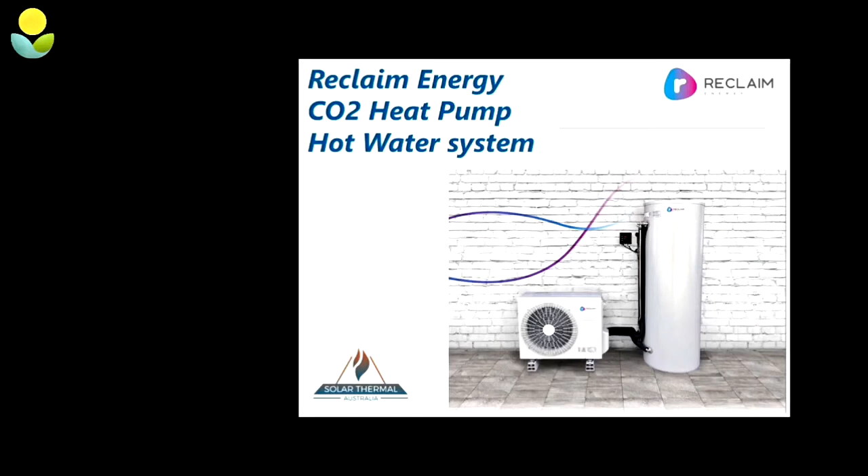Thank you, Jeff. Glenn, got to say, what a great presentation. I always learn something every time, and there's a few little things even that I've learnt tonight. So everyone, importantly, please feel free — Jeff, much to your disgust, there is a little bit of technical information in here tonight. So anyone who has any sort of question, please put your hand up, tell me to stop and we can discuss. Doris had some great questions before, and I'd be interested in discussing that further with you.

My name's Jason Parson. I'm from a company called Reclaim Energy. We've been around now for around 2 years. We do what's called a CO2 heat pump, which is the refrigerant being CO2, a naturally occurring refrigerant in the atmosphere, and we can basically draw the ambient air and convert that into energy — that's what we call an air to water heating cycle.

So there's a picture of the unit there on the screen, for everyone streaming at the moment. We've basically got what looks like an air conditioning split system, and what we call a storage tank too. So what we're going to talk about tonight is why a heat pump. Everyone knows a heat pump — it can be called a few things, these things here are called heat pumps. We're an air-to-water heat pump as opposed to air-to-air, so that's basically hot water as opposed to air conditioning.

How a heat pump works, why we use a CO2 refrigerant, a bit of an overview on our system being the Reclaim Energy CO2 system, certainly some key advantages on why you would do this, our smart controller features, which will be something you'll be interested in, Doris. Our range of hot water tanks — we do different tanks depending on where and what type of water quality you have.

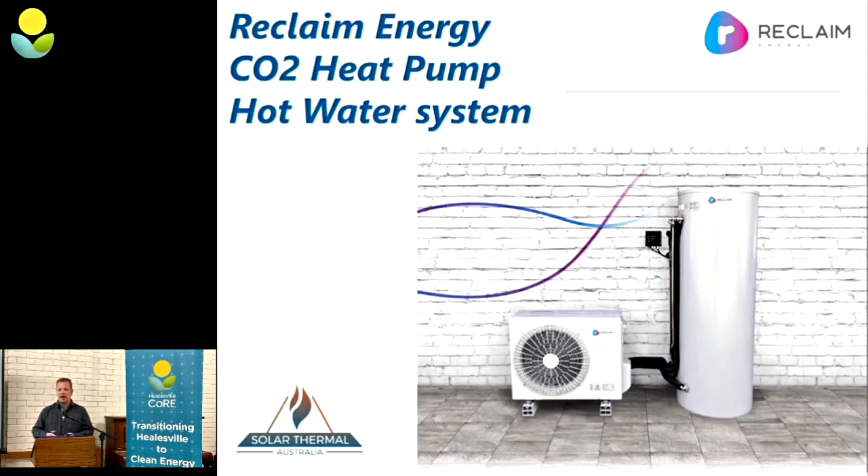Glenn touched on some of that before, and we can show you with a couple of little models here. The rebates that are available, so the three versions, we've got what we call STC, VEEC, and the Solar Victoria rebate. We've got a bit of a case study to share with you tonight, so you can have a look and understand the advantages in buying a system, and we've got some installation pictures on how the systems look once they're installed.

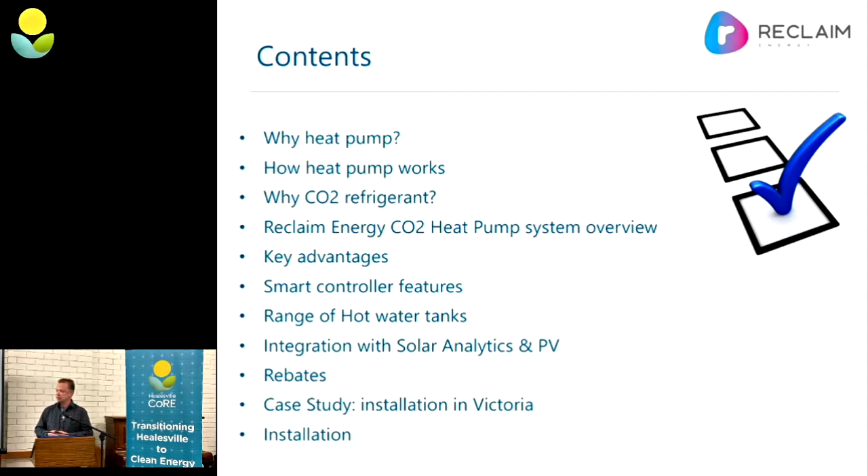So, why a Reclaim Energy heat pump? Pretty simple. It uses a lot less energy than a resistive element type water heater. We use, depending on the heating cycle, around the 900 to 1100 watt mark. It is a clean, renewable source of energy as well.

So as we can integrate our system with the likes of PV, for whoever's in the room lucky enough to have solar on your house, we can actually utilise that energy that you'd otherwise be exporting to the grid, getting, what was it Jeff, 13 cents a kilowatt, and using our system as a storage device. So instead of exporting that excess energy to the grid, we can store that, and then release it later in the way of showers, baths, whenever you want.

High efficiency in what we call a COP, which is a coefficient of performance. I'm not going to go too much into that. That's basically the amount of energy that goes into the unit as opposed to the energy that comes out, and I'll touch on that a little bit.

The integration with PV, as Glenn touched on before, we've got on our smart controller, which I'll talk about more, some different options. So you can do your heating cycle whenever you want. The system needs to do a daily heating cycle as per the Australian standard, and that can generally work quite well with a system, say 4.4 kilowatt. We would use, on a really sunny day, maybe a quarter of that energy to do your full heating cycle for the day.

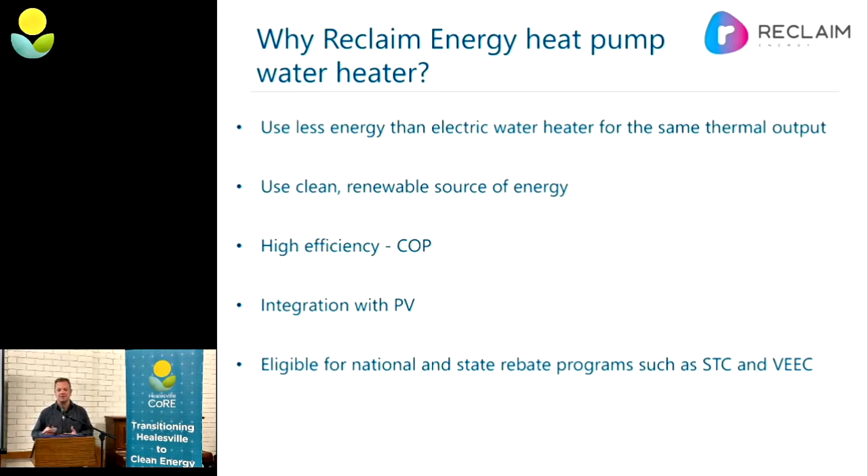And then when you get home at night, you'd have a tank full of hot water, have a nice hot shower. And importantly, we're eligible for all the national and state rebate programs such as STC, VEEC and Solar Victoria, which I'll talk a little bit more about.

Importantly, the refrigerant we use is R744, which is a naturally occurring gas in the atmosphere. So anyone who knows some of those older style heat pumps or air conditioners that are really particularly nasty for the environment, we use a natural refrigerant, which is about as good as what you can get in the market.

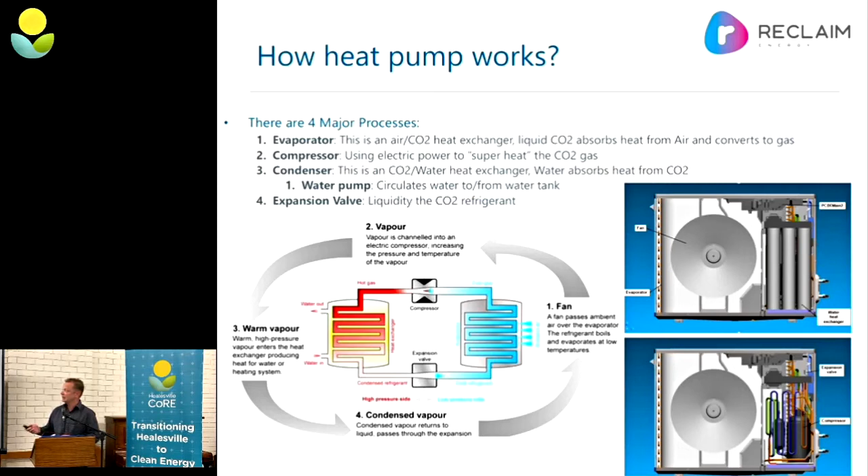So in that, obviously the global warming potential is nearly zero for our unit. Because of that gas, generally any air conditioner will release its gas at some stage in its life, even though refrigeration mechanics do their best to capture it, it has to be released at some stage. With ours it naturally occurs anyway, so even when it does release, it's not going to damage the environment.

It was a big thing in the 80s with the CFC revolution and all that sort of stuff. And CO2 is one of the few natural refrigerants which is neither flammable nor toxic, which is important. It's inexpensive, widely available, and does not affect the global environment as do many other refrigerants, as I said before. And there's obviously a net surplus of CO2 - we're all trying to get rid of this stuff, aren't we? So we just turn it into heating.

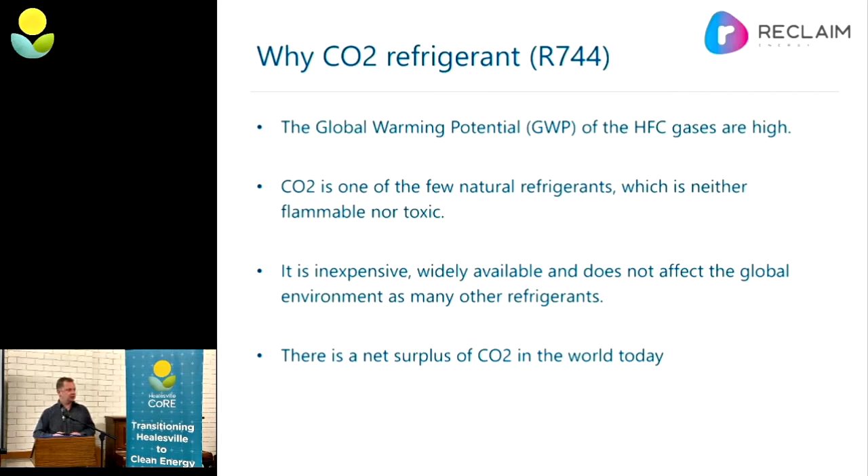So there's a bit of a system overview, and we've got a system there installed. We've got basically our storage tank on the right hand side, and that's basically our energy storage device. We've got our CO2 compressor there.

One thing with our particular units is they're incredibly quiet. When they start up, they are whisper quiet, which is important, because a lot of times these are outside bedroom areas, so we want to make sure that they're incredibly quiet. In Healesville, as I said, I live here so we can have some frosty mornings, unlike a lot of the other cheaper heat pumps in the market. Ours will work down to minus 10 degrees, which is well and truly enough to get down to the temperatures we have here in Healesville of the minus 3s, maybe a minus 4 on a really nasty frost.

So then we've got our smart external controller. Importantly with that, there's another slide coming on this, that controller enables us to use the energy or store the energy when we want to. So we can have it in 5 different modes.

We can have thermistor mode, which is if you're a high demand user and you don't necessarily have PV on your house, once the tank temperature drops, the unit starts and it starts its heating cycle, and then once it's hot enough, it'll turn off. Option 2 and 3 are both off-peak cycles, so we can utilise some of that off-peak energy. Option 4 is our solar PV cycle, so basically the unit will do its heating cycle between 10 a.m. and 4 p.m. Option 5 is fully customisable.

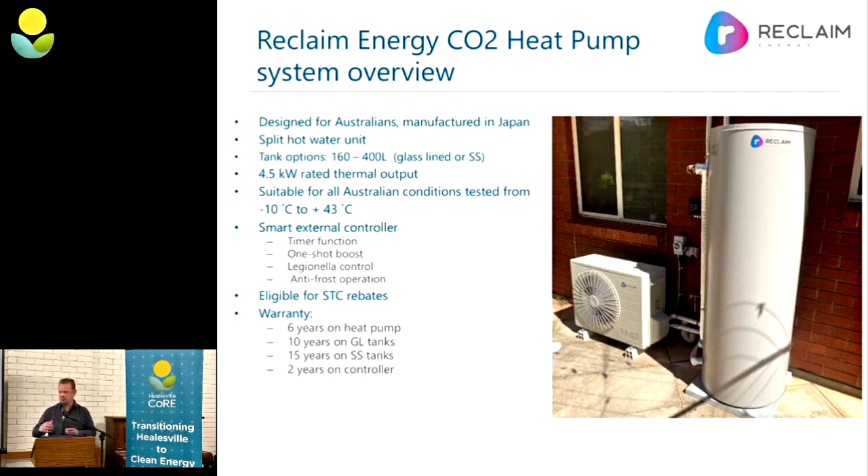So that's a bit of a system overview on how the system works there. We've got our compressor. The way that we heat hot water is traditionally different, okay?

With a standard electric resistive element type water heater, we've got an element stuck in the side there. Now that heats from the bottom up. What we do is draw water from the bottom of the tank, put it through the heat exchanger, and return it right to the top of the tank.

The reason why we do that is, one, it's probably the most efficient way to heat hot water, and the other big reason is that demand is available straight away. Anyone that's run out of hot water and had to wait for the element to kick in and heat up knows the struggle. With our unit, when it's running, you'll have enough hot water for a shower after 20 minutes of the unit running.

They're incredibly good at recovering for a short shower. For instance, if you're in PV mode and you had all the family over and everyone wanted a shower all of a sudden, you can put the unit in boost mode, push one button, the unit will start, and after 20 minutes you've got enough hot water to basically have another shower.

So some of the key advantages of our system compared to whatever else is available on the market. We talk about COP, coefficient of performance—that's the amount of energy that we put into the system as opposed to what we get out. Ours is an industry-leading COP, with a highest COP of 6.02.

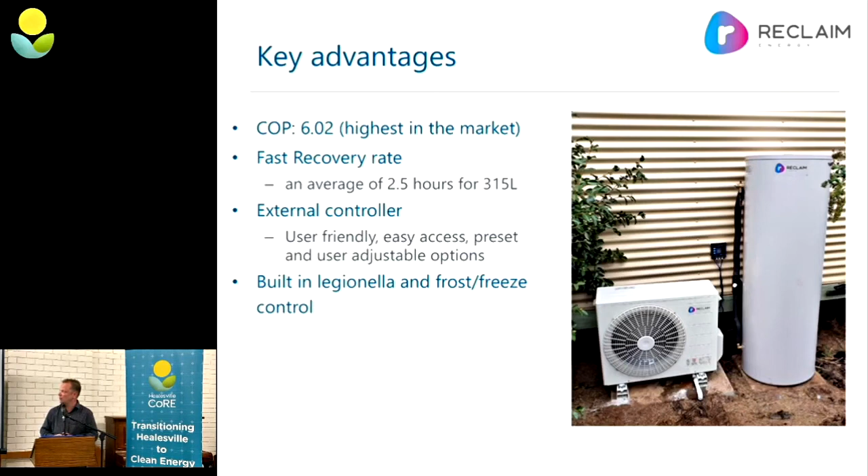I've touched on some modelling to give you an idea of how much energy we use and how we store that energy. We've got an average energy saving of around 75%, which is probably relative to what you've got at the moment, Doris, with a resistive element water heater - so we'd be around 75% more efficient than your water heater currently. That's with zero PV. With PV, it's higher again - we'd be well into the 90s if your solar system is performing well, in good condition, and we've got that surplus energy you'd otherwise be exporting to the grid.

Average noise - again I touched on this before, it's really important because a lot of these water heaters are right beside bedrooms. We are a compressor, so they're not silent, but we're about as quiet as what you get in the industry these days. Anyone who's heard these units running realises that they are incredibly quiet.

So, ozone-friendly CO2 refrigerant, which we touched on before. And we've also touched on the smart top-down heating. Does that make sense to everyone, the way we do it? With a traditional element, it plugs into the side of a tank and heats that, and then hot water rises.

We're actually drawing that cold water and putting it straight into where the demand is coming from. So all hot water services draw from the top of the tank, because that's the hottest part of the tank - we're returning the water into that same location.

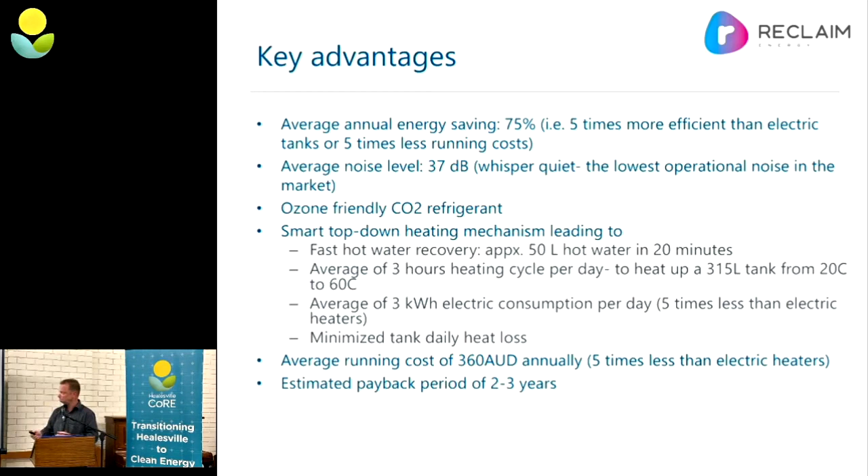Yeah, I've got some modelling. I haven't got that in the presentation, but I can show you afterwards - modelling for all sorts of different technologies, whether it be electric boosted solar, gas boosted solar, gas storage, electric storage, gas instantaneous, so LPG and natural gas. I've got some interesting stuff. Great question though, because it's completely valid.

Heat. Yes. So we're constantly heating at 63 degrees, which is enough to basically kill that Legionella. So what we need to do is basically a complete cycle of all that water through the system once a day, depending on the temperature or the residual energy left in that tank. So say if we've had very little demand, the system might only need to run for an hour or so, just to get that.

We actually measure the temperature at the bottom of the tank, so the system will stop when we get to 58 degrees at the bottom. I can show you some of the stuff on how that works.

Our units come standard with what we call a smart controller. Now what that does - it does quite a few things. One thing it does, which is the critical part of this, is it enables us to control when we're doing that heating cycle.

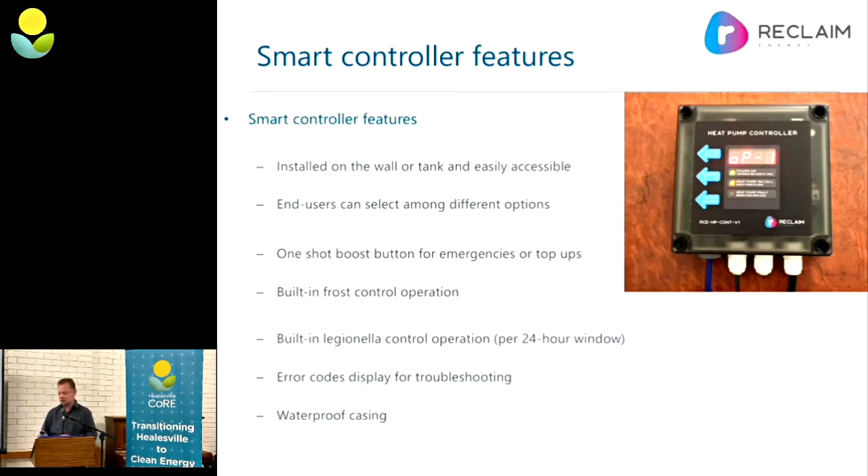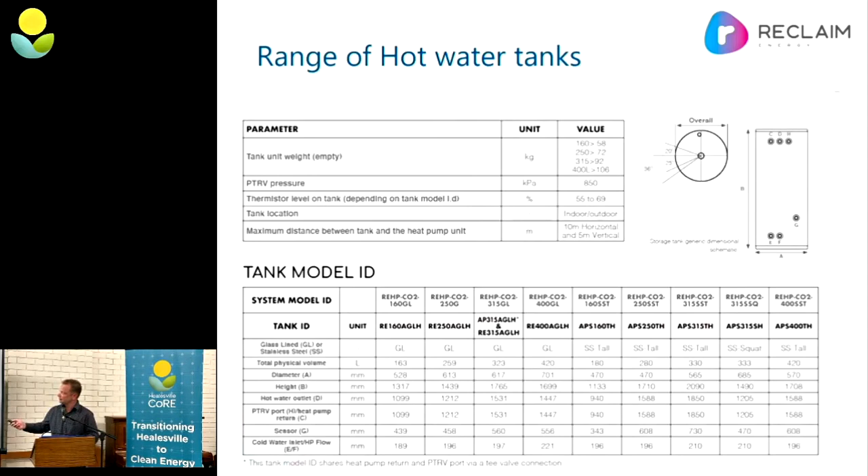Solar analytics - as Glenn touched on before, it's up to you. Some people, and I'm probably going to do it too since I'm a bit of an energy nerd, will have solar analytics on their house, so I can see my PV system and how much energy my heat pump is drawing, to get a really good understanding and get the maximum out of that heating cycle. With 2 little kids, it does annoy me when I get home - at the moment I've got a gas water heater and I'm about to change it, and it annoys me when I hear the gas noise start up because I've got PV. So for me it makes absolute perfect sense to have this.

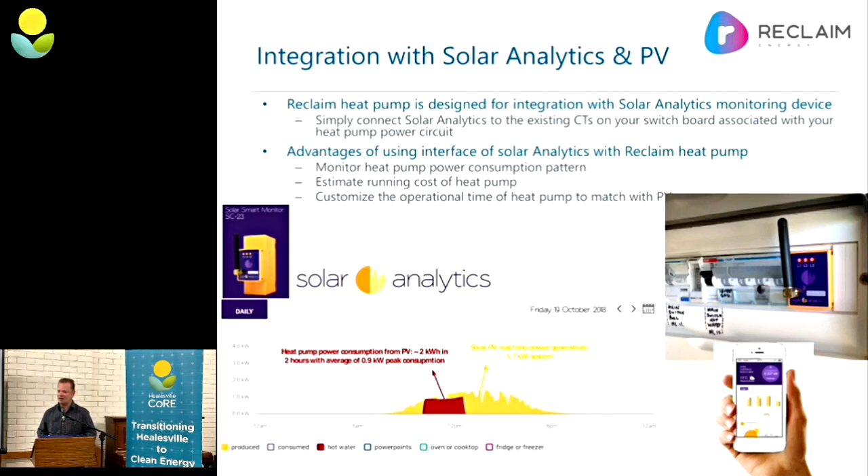With VEEC, depending on the postcode - and obviously Healesville we're 3777 - we can get anywhere from 29 to 31 VEECs, again roughly at that $36 mark. So it is very, very attractive at the moment.

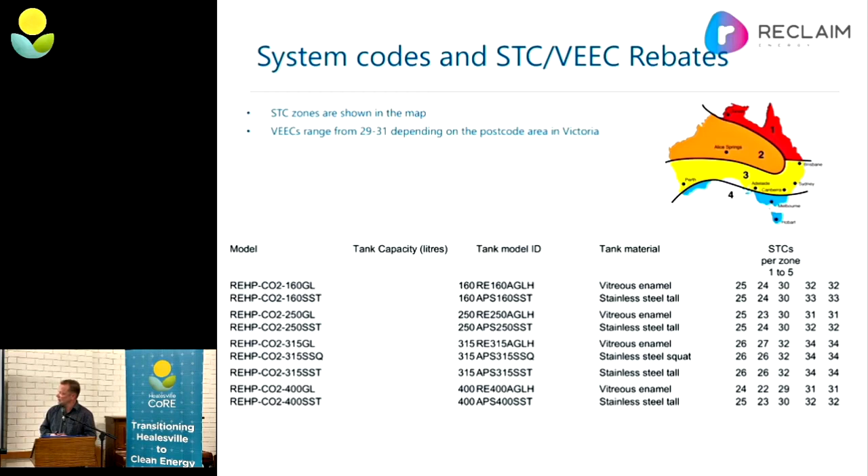That's our case study there, so we can see that's some solar analytics. What we've got there is a small system - a 2 kilowatt unit, that's basically our heat pump, the energy it's using. So if we say from roughly 10 o'clock in the morning to roughly 2 o'clock in the afternoon, we've done a complete heating cycle, and we've used 2 to 3 kilowatt hours of energy.

That's as opposed to our electric tank, shown the same here above, which generally does hotter water all day long. So that's part of the reason why we're so efficient the way we heat water - an 80% reduction. All right, so that's our 315 litre tank.

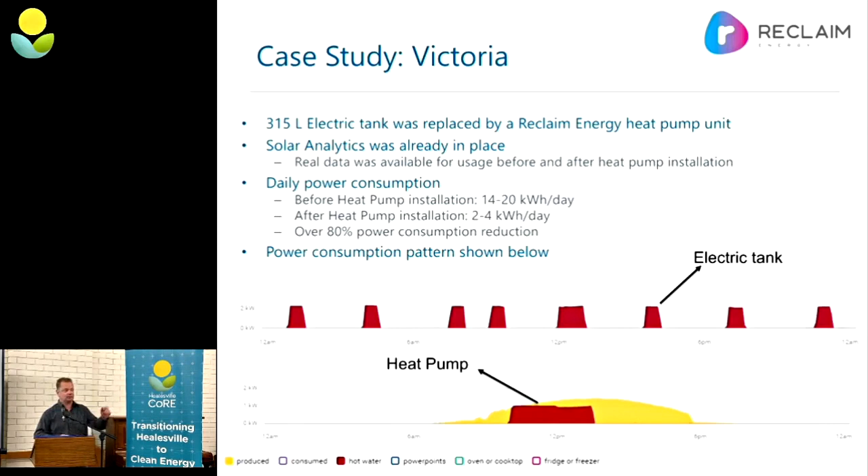Annual energy savings, cost assumptions, annual cost savings, payback. Let's just talk about payback period for a little bit.

It's important - we're certainly not the cheapest water heater on the market. The technology we use is at the forefront of what's available now, with the CO2, the smart controller, and the different tanks that we use.

So what I'd like to do for anyone who's interested tonight - register through the Healesville CoRE website, and I can do some modelling for you to give you an idea of what the payback will be compared to what you've got at the moment and whatever else is out in the market. I'll have to be a little quick getting through this, we're getting wound up by the chief in the corner here.

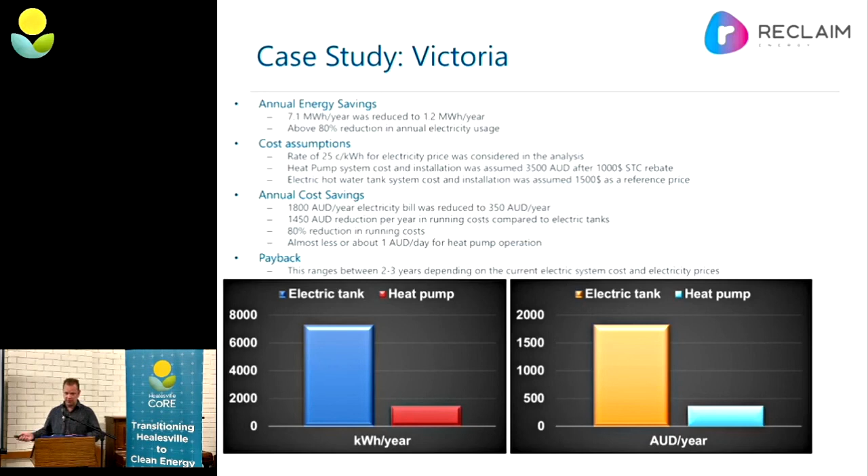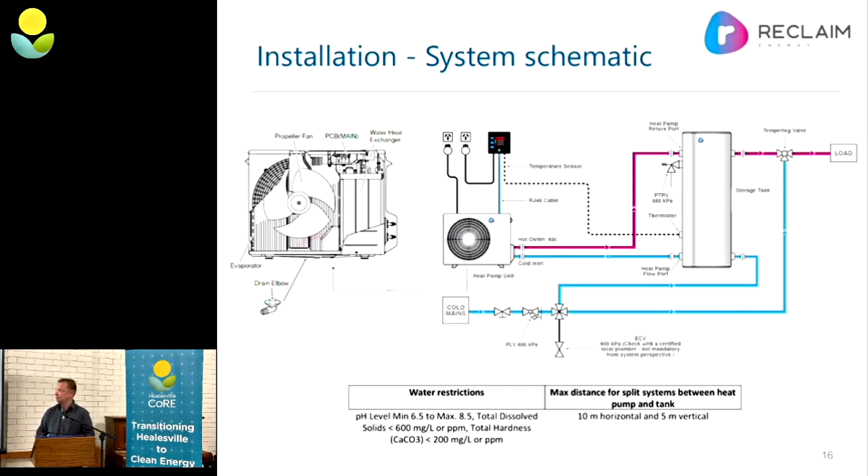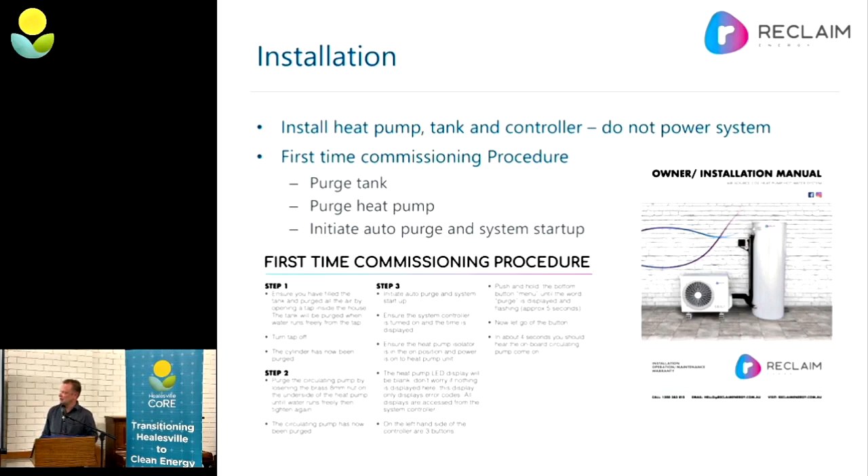So that's basically our commissioning guide - a 3-step commissioning guide which is very, very simple. Everyone goes, 'oh, heat pumps, they're tremendously technical' - they're not. All we are is a standard electric water heater - instead of a resistive element, we've got a compressor beside it. So they're very simple. Even contractors and plumbers can get quite worried about it, but there's nothing to worry about. They're very, very simple, and there's some photos of some installs there too.

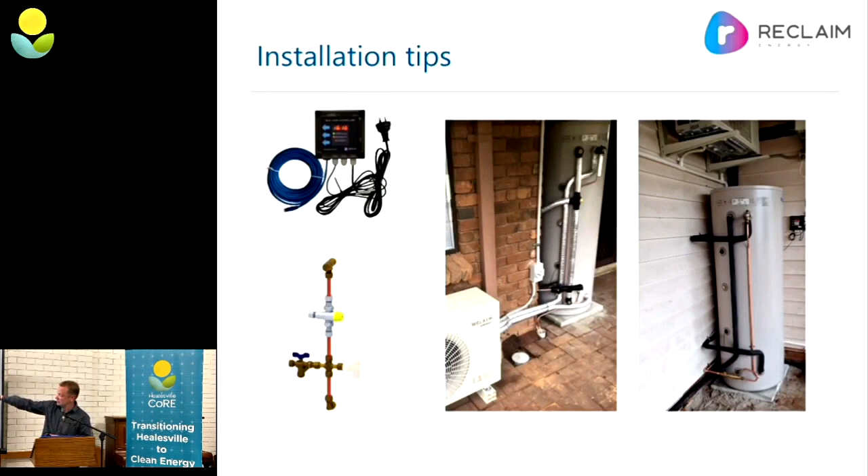So I'll finish on this Healesville bulk buy program that we've been running for quite a while - I think, Jeff, we've done 15 or 20 in the Healesville community. Register your interest through the Healesville CoRE website, and thanks to everyone for coming tonight and to those who've registered online. Then basically what we do is book a home visit.

That's a $50 donation to the CoRE. Then either myself or one of the two contractors, Steve Thomas Plumbing or Stefan from Kudos Electrical, will come out and say, okay, this is roughly what it's going to be. From there, we'll agree on a complete quote with no hidden extras - that's what the quote's going to be, it will not change.

From there, we'd take a 20% deposit and book an install date. You pay for the system once it's freighted from our facility in Hallam, you pay the contractors on the date of installation, and then we claim the rebates.

Then we start to talk about STC, VEU, and Solar Victoria. I'll mention that Solar Victoria needs to be pre-registered if we want to utilise that - you get it once, and it's means tested. Myself or Glenn can certainly talk to you about that tonight, and some of the intricacies. Once that's happened, for the STC and VEU it's generally about a week or two's notice, and that'll get paid straight back into your account.

And then from there, we get to enjoy the benefits of a high efficiency, whisper quiet, environmentally friendly water heater, year on year, for years to come.